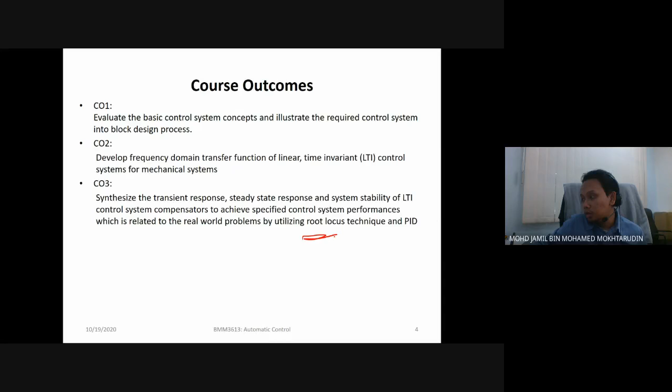For example, here we use root locus and PID. There are a lot more methods, but here we focus on root locus and PID, in this course outcome.

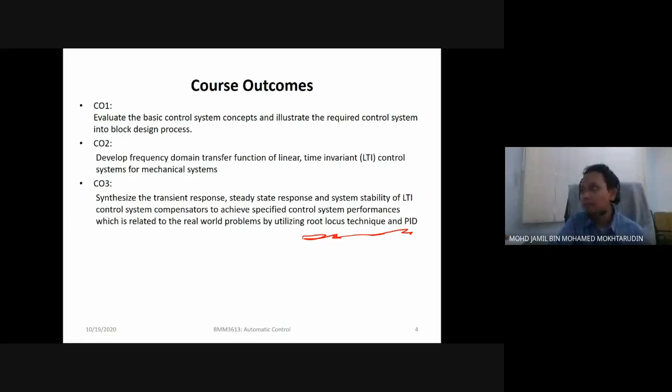So the content of the subject divided by weeks is shown. This week we will go into learning basic control system concepts. Today we go into basic control system concepts, and in the next 2-3 weeks we will learn dynamic systems, how to model them, and then go into analyzing control systems. Usually your midterm covers chapter 1 until chapter 2, maybe the first section of chapter 3.

Chapter 4 is about root locus. Chapter 5 is designing controllers using frequency response techniques, such as bode plot. And lastly, we will go into PID controller design. For your final, all topics will be asked. But for the midterm, only topics 1, 2, and 3, the first section, the first subtopic.

For the reference, I would suggest you find the first reference here, Norman Nise's Control Systems Engineering, because the lecture notes follow this reference.

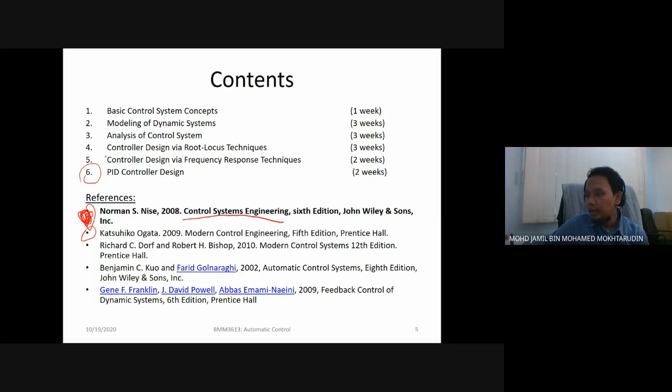The second one is for chapter 6. The others are not important, they are just there to complete the reference list. We are required to put 5 references for you guys, but the most important are the first 2. The remaining are not important.

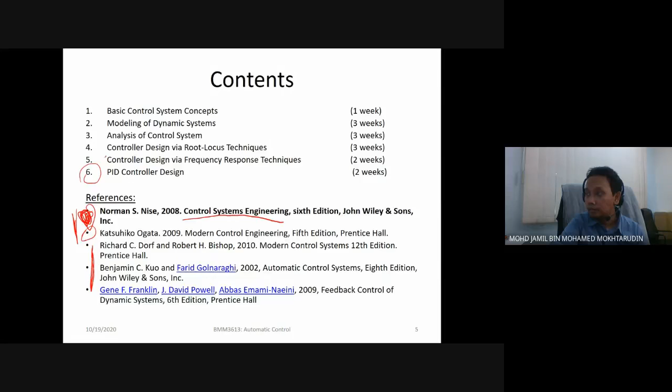So for assessment methods: you will have midterm exam 20%, and project plus quiz totaling 40%. For project, I will brief more next week. Basically you are required to use MATLAB, so try to get MATLAB. Project will be in groups of 3 maximum. Final exam is 40%, so all total 100%. If our final is online, then it will be converted to 20% and the carry marks will be 80%.

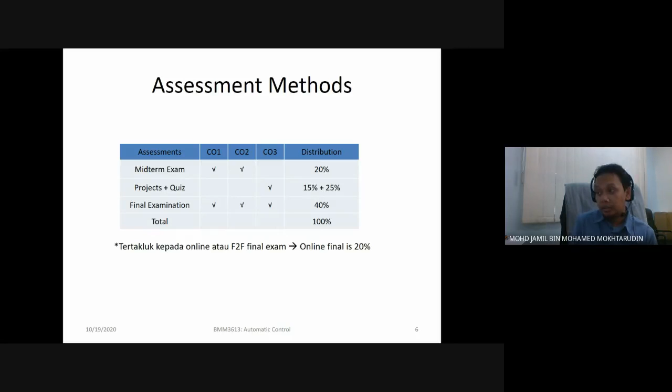So for project and quiz, it will be split into 25% quiz and assignment every week, starting this week, inshallah, and 15% actual project.

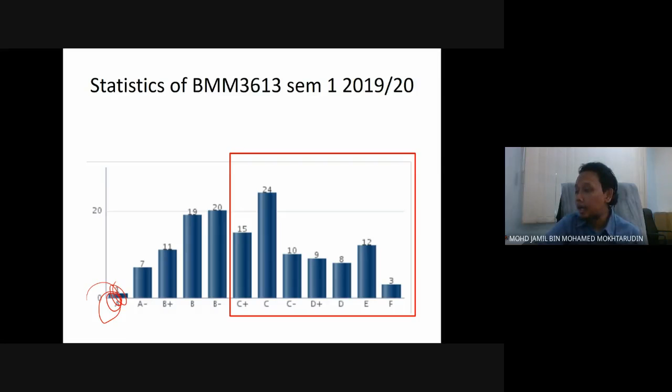First reason, because the classes were face to face before, so some of them kept ponteng (skipping). For our class, since it's online, you guys can ponteng the online class, but please watch YouTube, okay? Watch the YouTube video. I know maybe it costs you data, but not me to be blamed and not UMP as well. You need to blame COVID-19.

Since we have a quiz every week, when you ponteng, then you don't answer the quiz. And since this is an online class, maybe some of you will answer the quiz by copying your friends. So when you copy your friends, when your friends are doing it wrong, then you automatically get the same marks, very low marks. And please ask questions if you have any.

Even a stupid question like what is automatic control, I will try to explain, okay? Don't be afraid to ask questions. If you are afraid, then it's not my problem, okay? It's your problem because the question will keep playing in your mind. So please ask me questions.

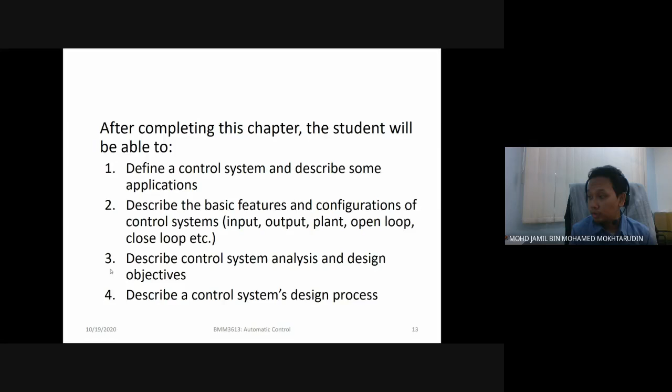To control the stability of a system. So in this chapter, after completing it, you guys will be able to define a control system and describe some applications, and also describe the basic features and configuration of control systems, such as input, output, plant, open loop, closed loop, etc. Number 3 is to describe control system analysis and design objectives. And lastly, describe a control system design process.

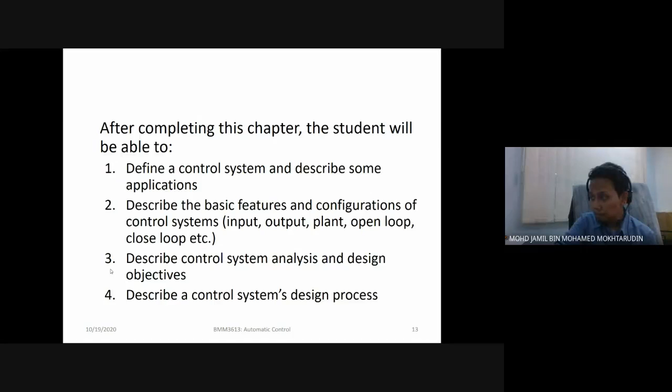Control system is an integral part of our modern society. There are many applications of control system, especially in engineering—mechanical engineering, for example the car I mentioned just now, computer science, and electrical engineering. In computer science, we use control systems. For example, when you learn programming, you use if-else statements or for loops. That's the control part of control system.

For electrical engineering, you use a controller to control, for example, robots like a robotic hand. Same for instrumentation engineering. And in chemical engineering, you put a control system to control the plant, such as how the plant will stop running after certain times, for example. There are many more examples if you look online, on Wikipedia for instance.

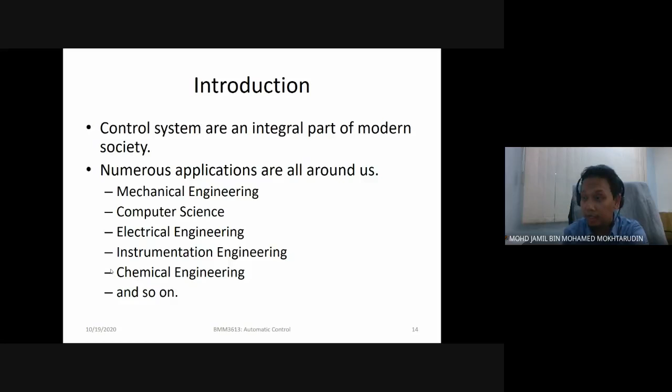So this is a basic example of a control system that you are probably using right now. I know some of you might be in the toilet watching this class. This is a liquid level control system—our flush system in the toilet. If you look here, in this system you have this ball, which controls the level of water in the tank.

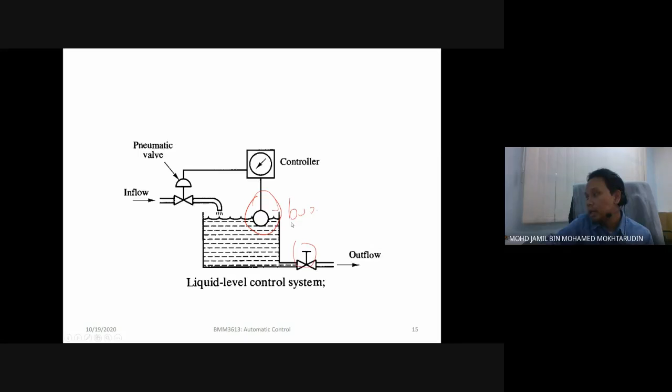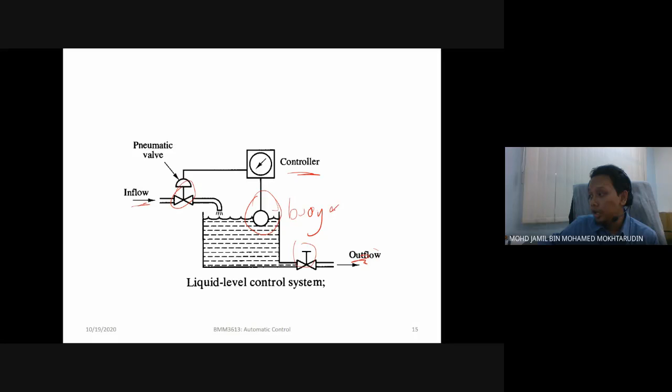When you flush and water flows out from this valve, this buoy drops and opens the valve. When the valve is open, water flows into the tank, filling it. When the tank fills, the buoy rises back to its original height and closes the valve. So this buoy acts as a controller for the liquid level control system. Here you have the inflow, outflow, controller, and buoy as the components of the configuration for the control system.

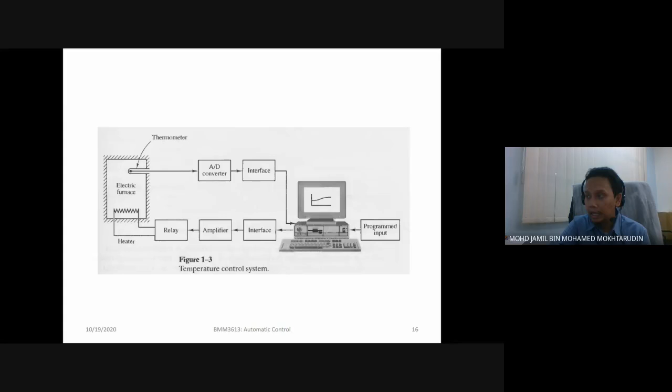This is another example of a control system—an electric furnace, used to melt metals, for example. You put metal in this electric furnace, and the system heats the furnace up to a certain temperature until the metal melts. This thermometer measures the temperature inside the furnace.

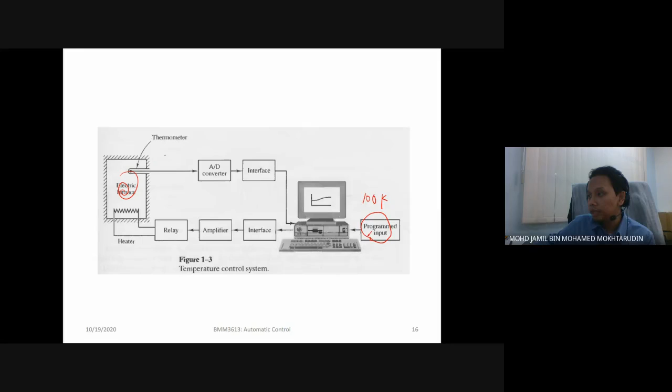Let's say the temperature drops suddenly—the thermometer detects the drop and sends a signal to the computer system, asking it to increase the temperature back to the value you set. That set value is entered in this programmed input. Let's say you put 100 Kelvin, and the thermometer detects the temperature is 70. The system will then increase the temperature back to 100 by adding 30 Kelvin. The system asks the heater to increase the heating process to bring the temperature back to 100 Kelvin.

The reverse process works the same way—if the thermometer detects the temperature is 110 Kelvin, the system knows it needs to drop the temperature back to 100, so it drops by 10. The system tells the heater to slow down heating so the temperature falls back to 100 Kelvin. This is how a control system works.

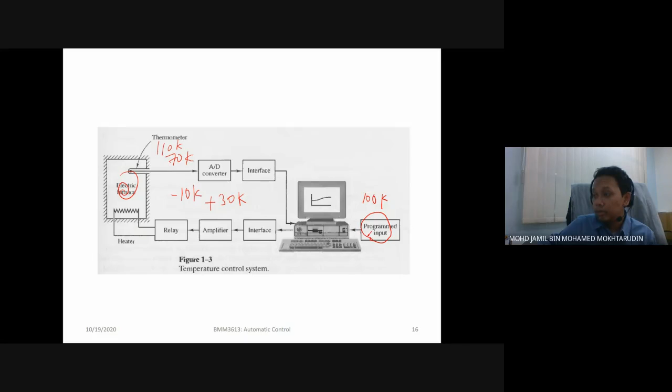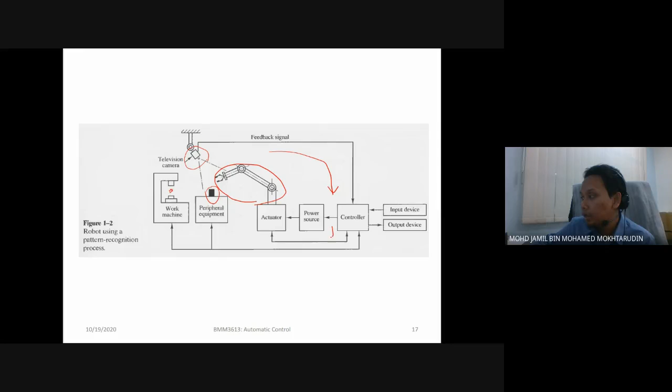Let's say the robotic hand moves far away from the block—the camera detects the movement and tells the controller to ask the robotic hand to move closer to the block. This television camera acts as a sensor, sensing the movement of the robotic hand. If there is a wrong movement, the camera tells the controller, and the controller asks the robotic hand to move accordingly.

So we have looked at three examples of control system. So what is control system? We will now define the control system.

A control system consists of subsystems and processes or plants assembled for the purpose of obtaining a desired output given a specified input. From the previous example, you give input to the system. For example, like the furnace, you give input 100 Kelvin, so the desired output will be 100 Kelvin as well. But there might be some changes along the way before you get the output. Maybe the temperature increases or decreases.

So the control system, the subsystem and also the process, will try to make sure the output is the same as what you desire, as what you give from the input. That's the purpose of control system. So here you have the input, the signal will go into a box. The box consists of the control system and will give an output signal.

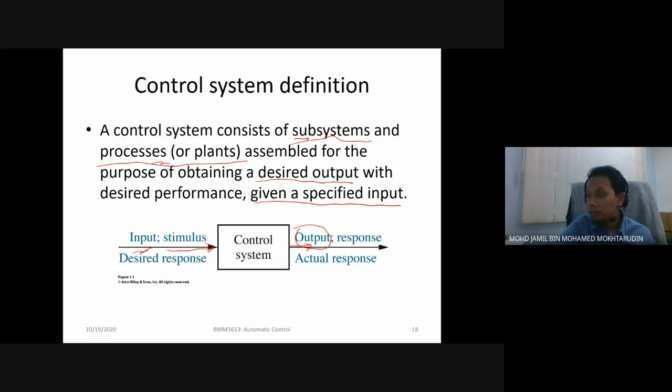In a control system, there are 4 elements for any given control system. The first element is the input. You must have input for your control system. Input, for example, just now is the 100 Kelvin you gave to the furnace system. That's the input that you want, you desire the system to produce the output later.

And then the output is the outcomes that you want from the control system, or the actual response from the control system. So the output you want is 100 Kelvin, but sometimes because of problems in the system, the output may be more or less than what you want. For example, the 100 Kelvin just now, maybe the output can be 70 Kelvin or 110 Kelvin. So it is not according to what you desire. That's why you have a control system to adjust the difference to make sure the output produced is the same as what you desire.

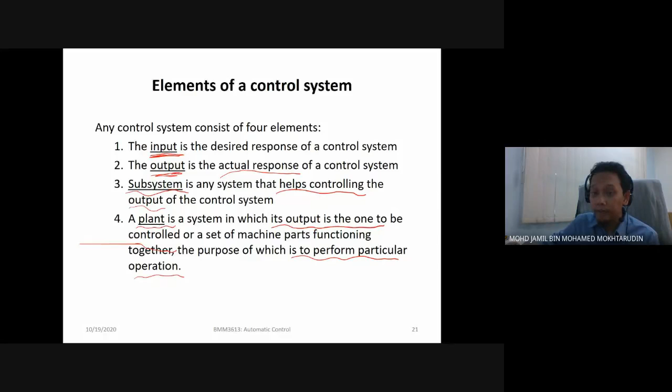And also the third element is the subsystem. Subsystem is any system in the control system that helps controlling the output, any other components that help in controlling the output. Lastly is the plant, in which the output is the one to be controlled, and it is the thing or the system that performs the particular operation. For example, the electric furnace, the plant is the furnace, because it is the place where everything happens, the heating happening in the furnace. So the furnace is the plant.

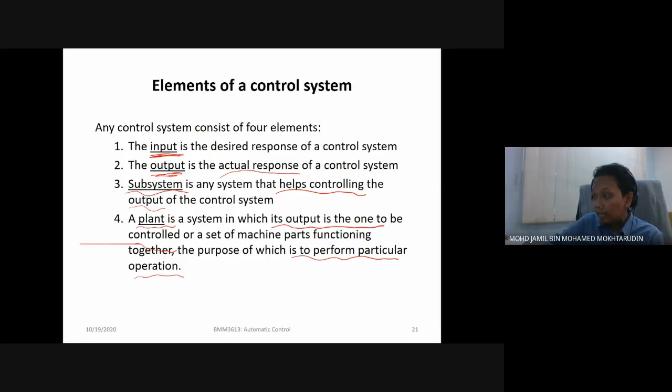So there are 2 types of control systems. The first type is open loop, and the second one is closed loop. Closed loop is also known as feedback control or automatic control. We will get back to this in the following example, what is open loop and what is closed loop.

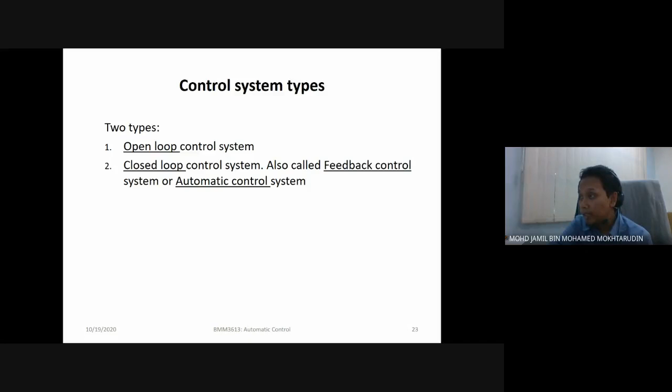Open loop is a system where the output is not compared with the reference input, meaning that, for example, the example given here is a washing machine. When you try to wash your clothes, you set the timing on the washing machine, maybe 2 hours for the washing process to complete. But let's say suddenly your friend stops the washing process, and then you realize that the washing process has been stopped, then you continue the process. So the cleanliness of the clothes is not the same as when the washing process is not disturbed.

When the washing process is disturbed by your friend, the cleanliness might not be as clean as when the system is not disturbed. When this happens, you know that the washing machine is an open loop, meaning that it does not measure the cleanliness of the clothes. If the washing machine measured the cleanliness of the clothes, then it would wash slightly longer because the washing process has been stopped, to compensate for the stopping of the machine. But because it does not detect that, it will keep continuing washing according to the time that was stopped by your friend.

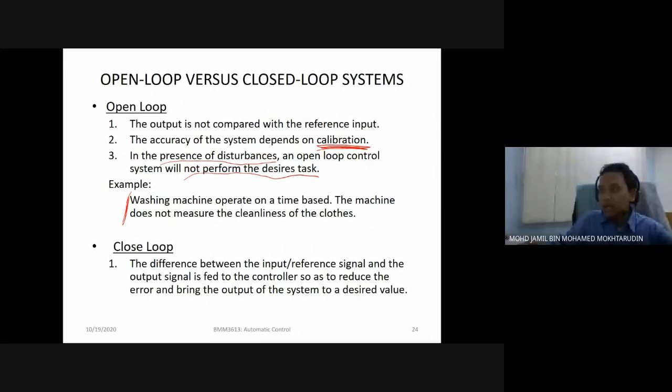So in an open loop system, you require calibration. Calibration means, for example, if the washing machine stopped, maybe you need to restart the washing process again, or maybe you need to calibrate the timing to add more time to the washing process. And also, when there is a presence of disturbance, like your friend just now, the system will not perform the desired task, it will not perform as what you want. So open loop systems tend to change in performance when they are disturbed.

A closed loop system is different from open loop because the input signal and the output are measured. When it is measured, it will be fed to the controller so as to reduce the error and bring the system back to produce the output you desired.

For example, if the washing machine is a closed loop, then it will measure the cleanliness over time to make sure the clothes are clean.

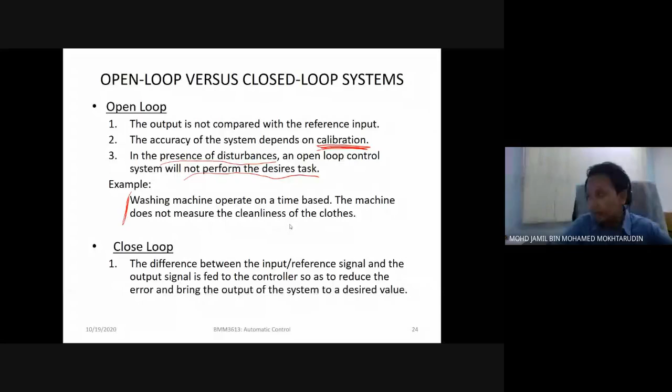So for a closed loop, the difference between closed loop and open loop is that in a closed loop you have an additional subsystem called a sensor. The sensor detects the output, then tells the controller to measure the difference between the output and the input, and asks the controller to either increase or decrease the process.

For example, the electric furnace just now - if there is a difference in temperature, then the system will either increase heating or reduce the heating of the heater. That's a closed loop because it has a sensor. So a sensor is an important component for a closed loop system.

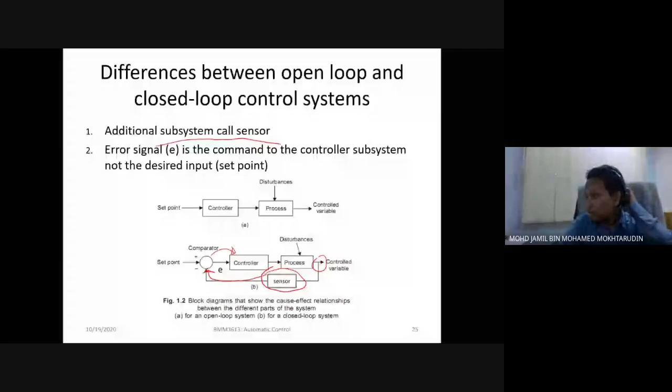This is another example of a block diagram for open loop and closed loop control systems. For the open loop control system block diagram, compared to the closed loop, it does not have this error, this feedback here.

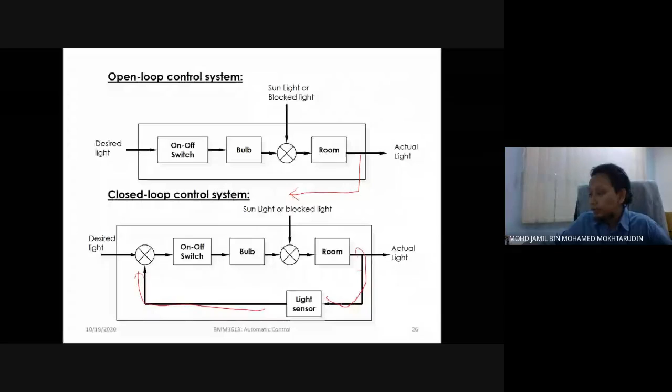So for a closed loop system, you must have this feedback arrow, and you must have the sensor component in the feedback arrow.

Also, in a closed loop system, you must have this thing, which we call a summing junction. We will learn more about summing junction in chapter 3. But you must remember that for a closed loop system, you must have the summing junction, the feedback arrow, and the sensor. You must have these three things.

If you don't have these three things, then maybe later for the quiz or final exam, the diagram must have all the necessary elements for the control system. So the first element is the input.

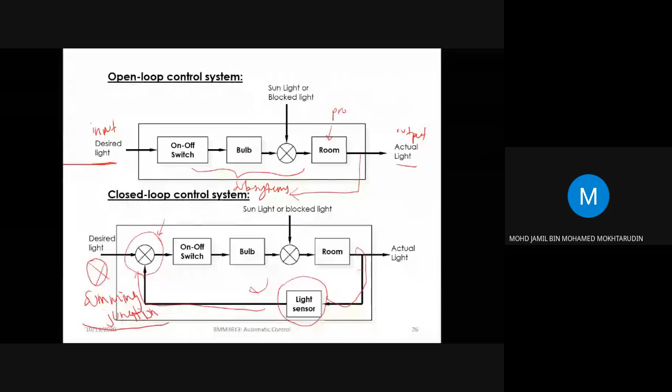And the second one is the output. Since this is an example of lighting in a room, the process occurs in a room, so the room here is your process or plant, which is also part of the subsystem.

And for the closed loop system, the difference is that it has a sensor, a feedback arrow, and a summing junction.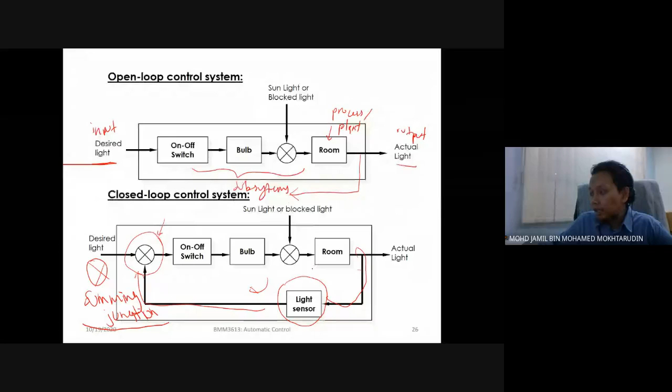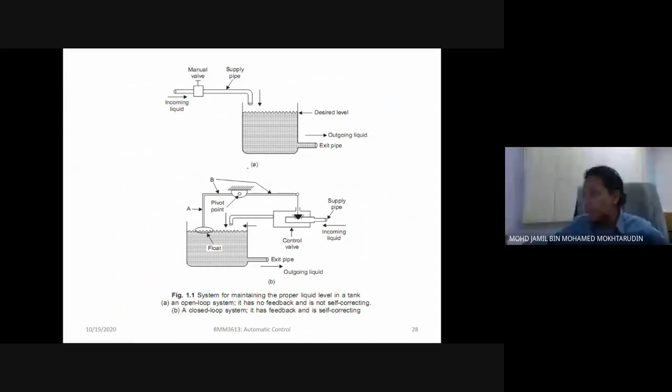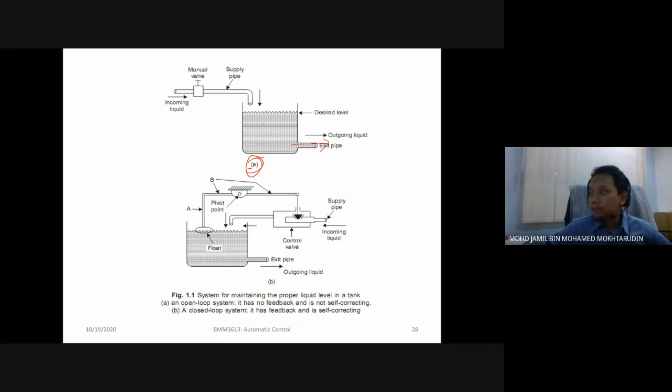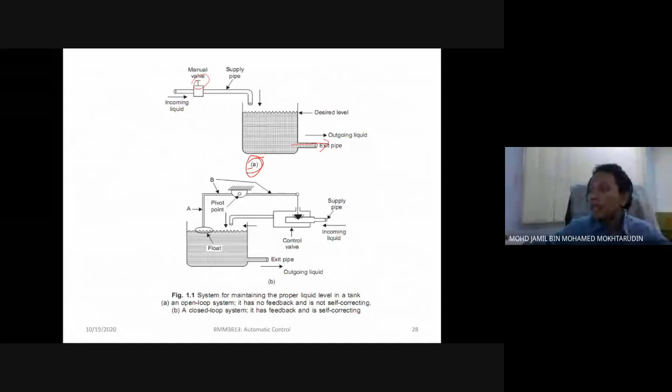So we go back to the example of the toilet flush system. Figure A is the flush system when it is an open loop. Here, when you flush out the water, the water will flow out, but it will not automatically be filled by the incoming liquid. So you need to manually open the valve every time you want to use this system, when you flush, to fill in the tank.

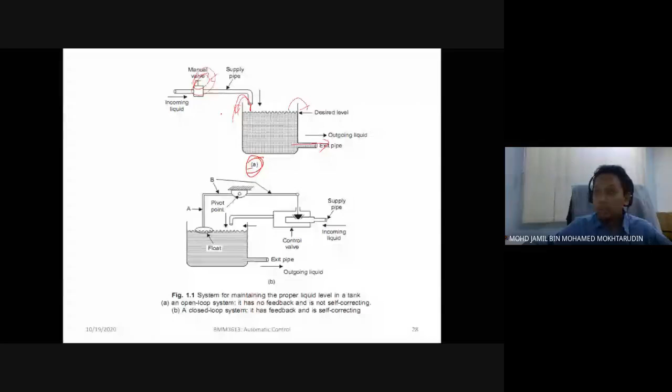If you don't close this valve, water will keep filling until it overflows. So to avoid the water overflowing, you need to turn off the valve manually - meaning you don't have a controller to automatically close the valve when the tank is filled with water.

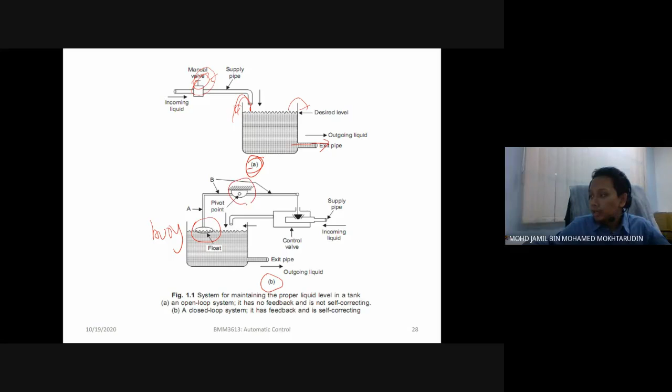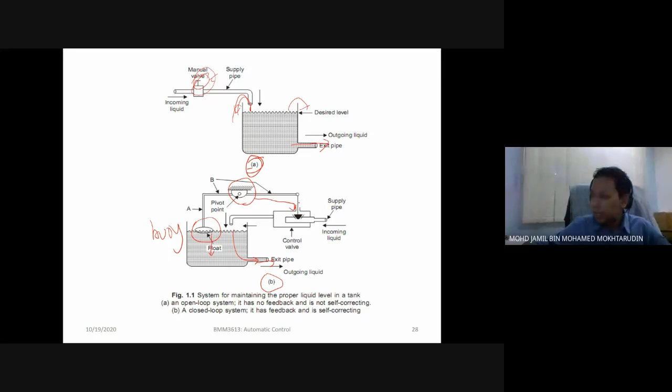The second, figure B, shows the system in a closed loop arrangement. Here you put a sensor, which is the buoy or float, and also a controller that connects with the incoming valve. So when you flush out the water, the tank empties and the buoy will drop. When the buoy drops, the controller or the pivot will open the valve and water from the input will flow into the tank.

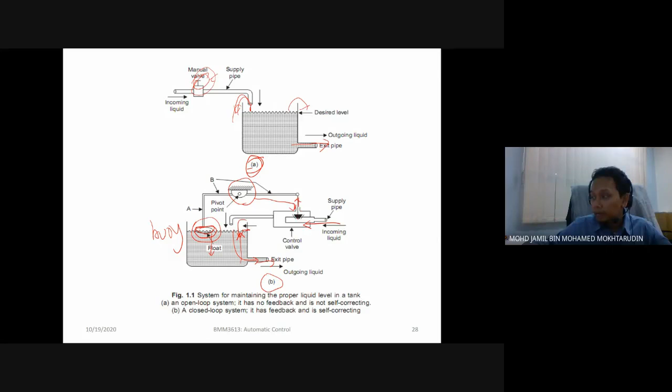The flow of water will continue until the tank fills with water until the buoy reaches a certain height or level. When the buoy reaches this point, it will ask the pivot to close the incoming valve, so the water will stop flowing into the tank. This is the difference between closed loop and open loop systems.

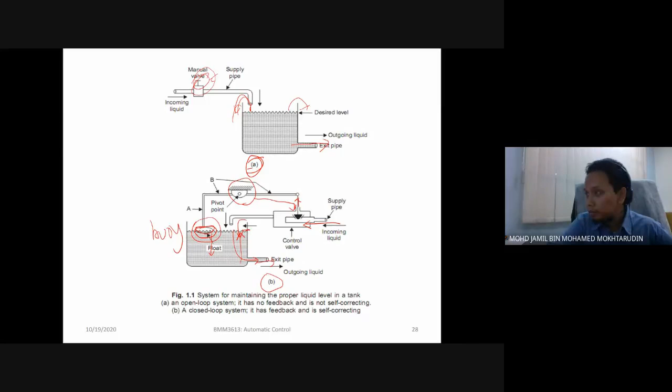Okay, so in the slide I already gave you the differences between open loop and closed loop. Generally, closed loop systems are more expensive because you are required to put more components, and the most expensive component in the system is the sensor. So because you need a sensor, it becomes costly.

Another difference is stability. In open loop systems, stability is not a major issue, but for closed loop systems there will always be stability problems. We will go into stability later in chapter 3. Basically when you have stability issues, you will have oscillation or changing in amplitude. You don't want oscillation to occur in your system because it may cause damage, for example like the car example with misalignment. When the car keeps vibrating, it will cause damage, so you need to remove the vibration.

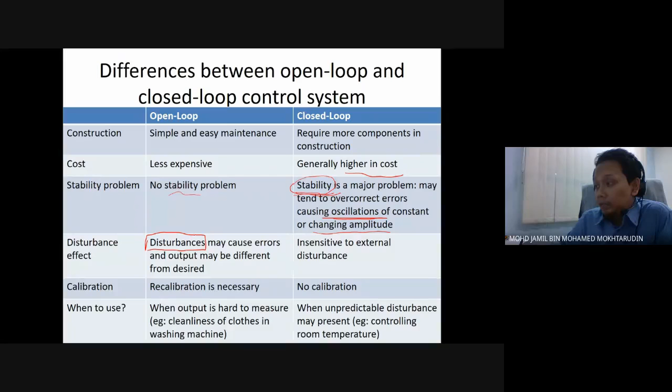For open loop systems, it is sensitive to disturbance. The example I gave is the lighting in the room - when you have external light, your room will be extra brighter than usual. But if you have a closed loop system for the brightness of the room, the system will dim the light when you have external light. So closed loop systems are not sensitive to disturbance.

For calibration, closed loop does not require calibration, but open loop you need to calibrate every time. For example, the flush system - you need to manually open and close the incoming valve. That's the calibration.

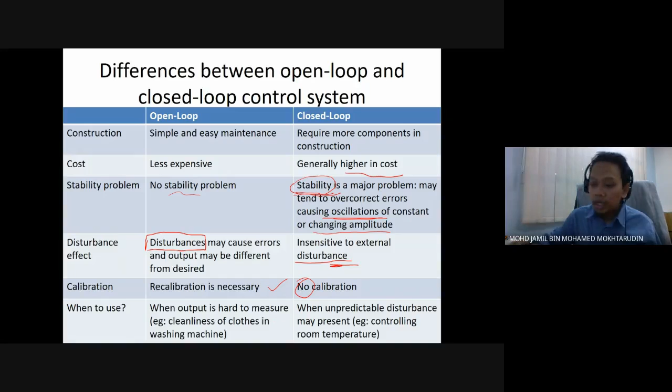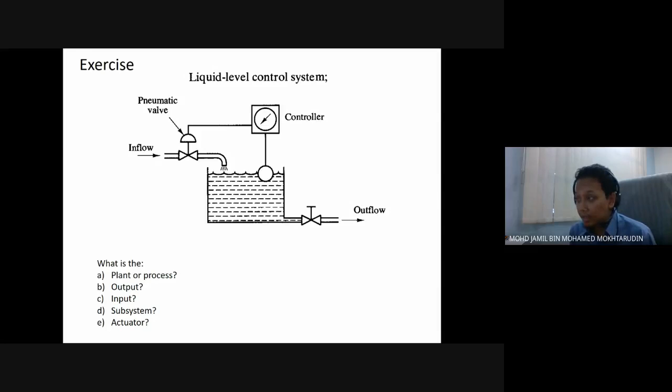All right, let's do some exercise. I know you guys are having your breakfast, so meanwhile, can we go and do this exercise together? This is an example of a liquid level control system. From this system, what do you think is the plant or process? Anyone? I give extra marks for those who answer.

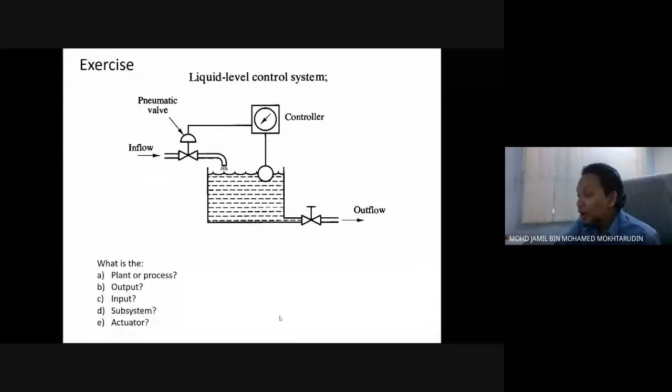Okay, so the water tank is the plant, and the output is the outflow of water. The input is the inflow of water. The subsystem is the controller and the float, and the actuator is the pneumatic valve.

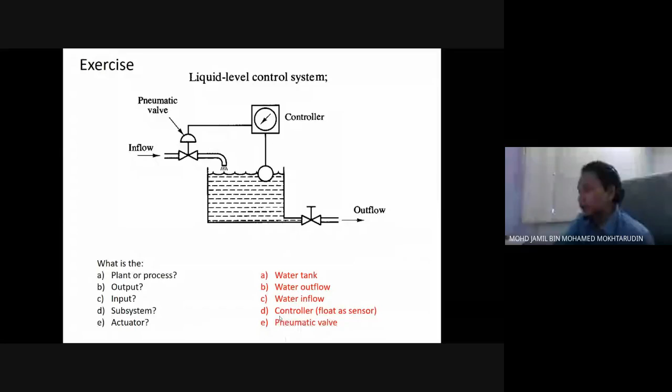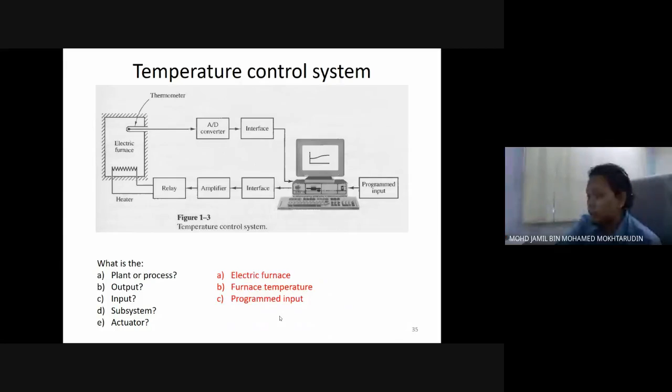Okay, so for the temperature control system, the electric furnace - what is the plant or process? The plant is the electric furnace. The output will be the furnace temperature. The input is the value of temperature you put into the computer. The subsystem are the remaining components in the control system, and the actuator is the heater.

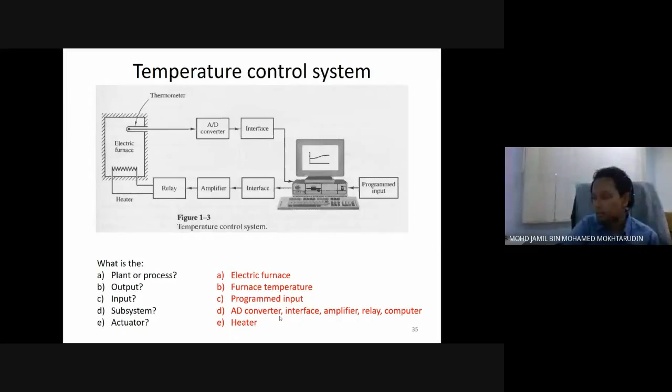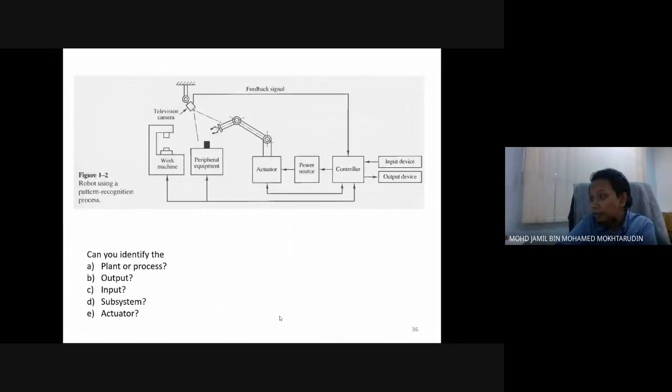And lastly, the robotic arm. The plant is the whole thing, basically the work machine and peripheral equipment. The output will be the movement of the robotic arm. The input is the movement that you want, that you input into the system. The subsystem is the controller, and the actuator is the robotic arm.